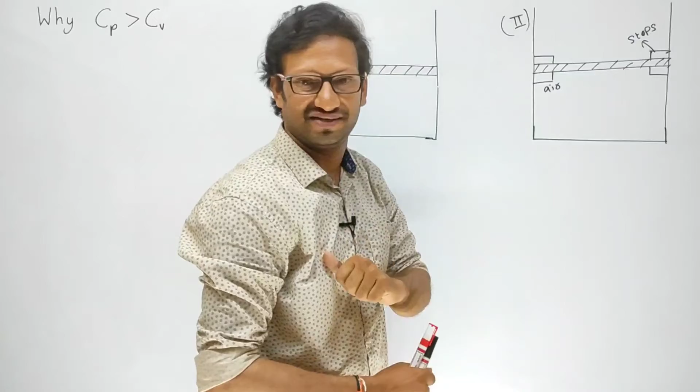Now listen carefully. Consider two cases of a piston cylinder arrangement. In the first case, the piston is freely movable. In the second case, the piston is fixed and cannot move in the upward or downward direction. Now, we know what is meant by specific heat - it is the ability of a medium to absorb or store energy.

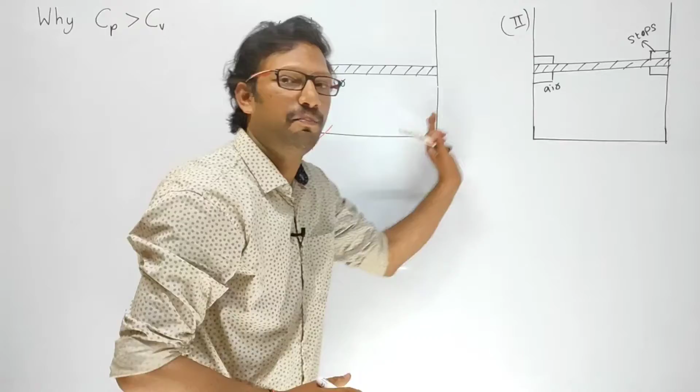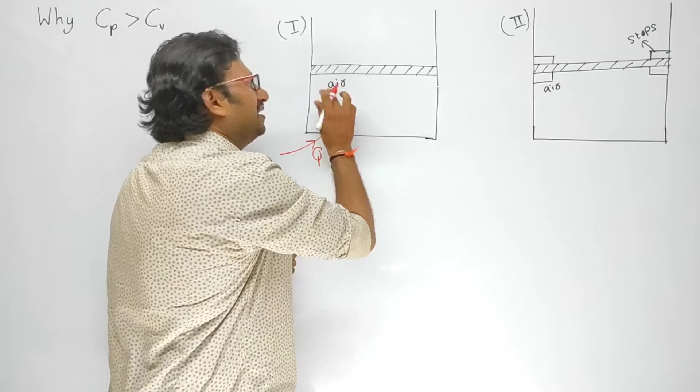Now listen carefully. By supplying heat to the system - here, what is our system? Air is our thermodynamic system in both cases. Now, by supplying heat in this first case, what happens? The thermodynamic system, which is air, absorbs heat. The internal energy of air increases so that its temperature also increases.

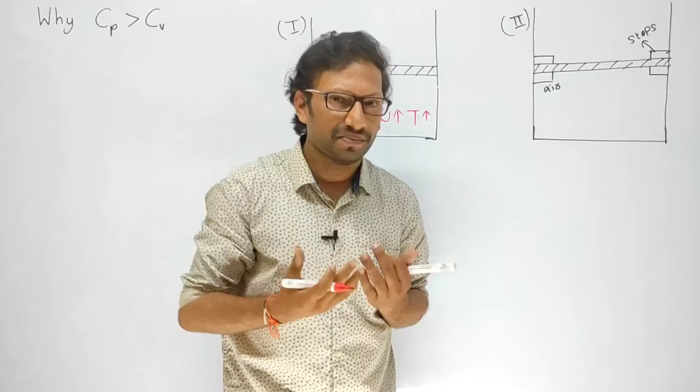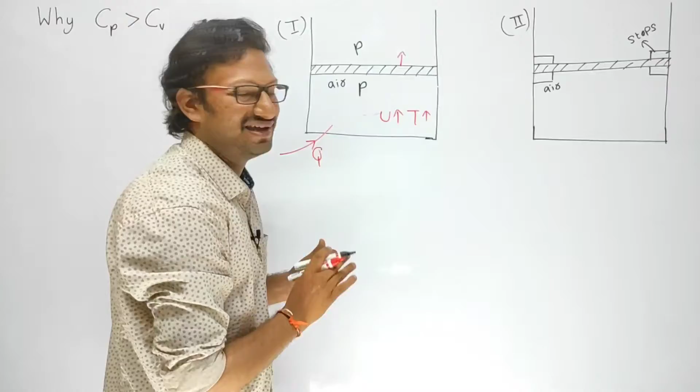Now what happened to the thermodynamic system? By absorbing heat, slowly it expands. When the air is expanding, what happens? The piston moves in the upward direction. When the piston moves upward, the inside pressure and outside pressure remain constant. Now can I say this first case is a constant pressure process?

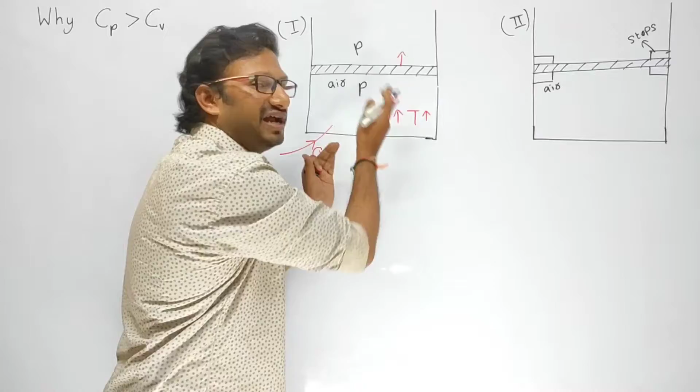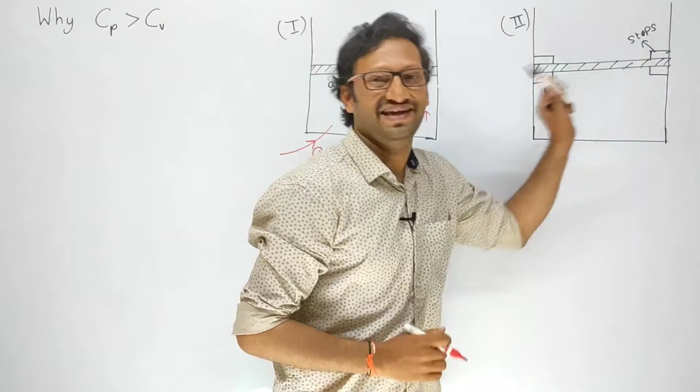Hope you understood - now we are supplying heat at a constant pressure process. Now coming to the second case, listen carefully: here the piston is fixed. Now slowly add heat to the thermodynamic system. What happens? The air absorbs heat, internal energy increases and temperature also increases, and slowly the air wants to expand.

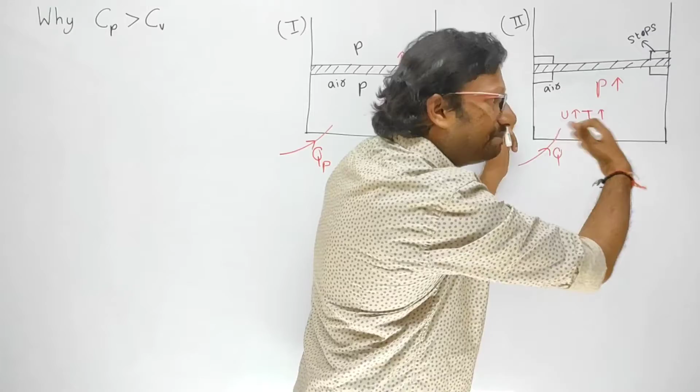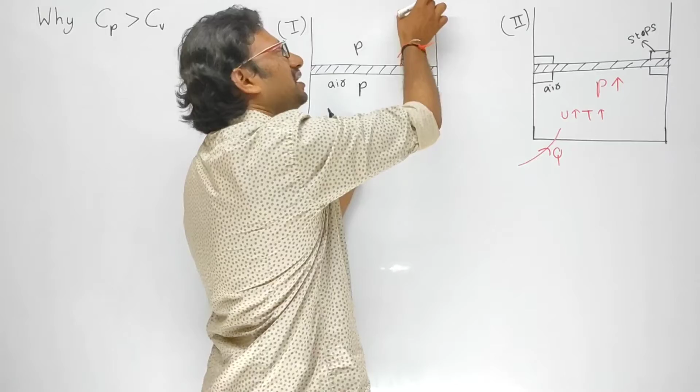What happened? Here the piston is fixed, so the air cannot expand. At this point, the pressure inside increases. And see carefully here - in the second case, after supplying heat, after some time, the volume of the thermodynamic system is constant; there is no change in volume. But in the first case, when the piston is moving upward, the volume of the thermodynamic system changes. In the second case, the volume remains constant.

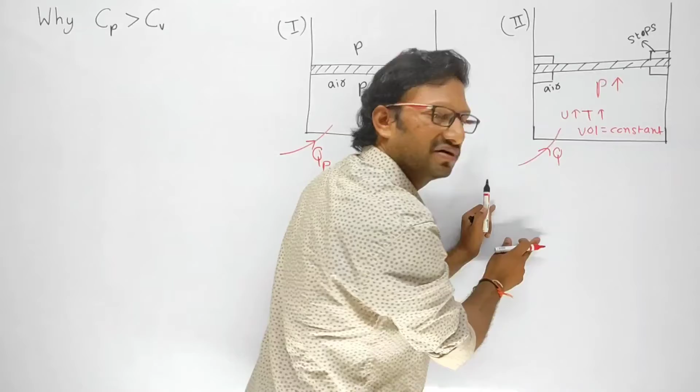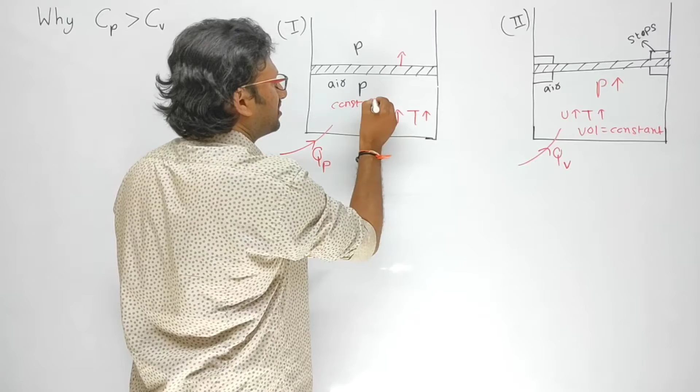Therefore, the second case is constant volume process. So we can say that heat is supplied at a constant volume process. The first case is constant pressure process. Now to understand this concept, I am going to take two conditions.

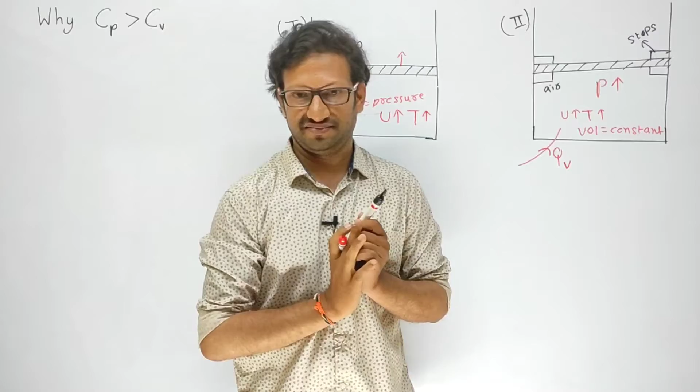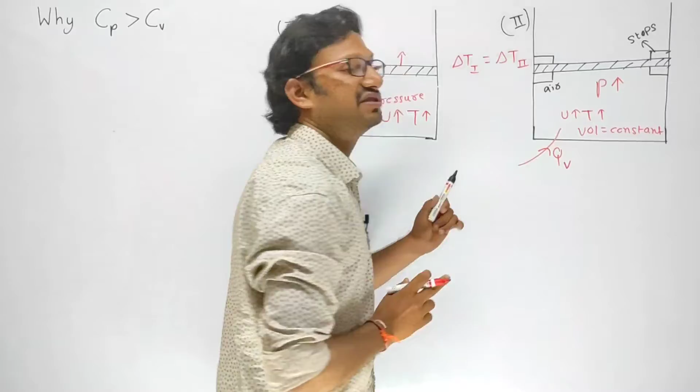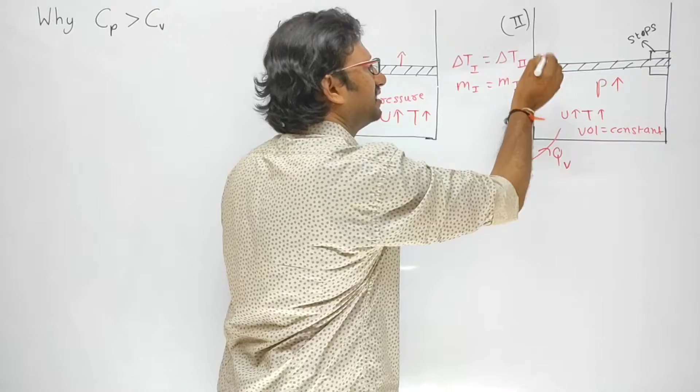What are those? Delta T in first case is equal to delta T in second case. This is the first condition. And mass of air or gas is same in both cases. Now please concentrate here.

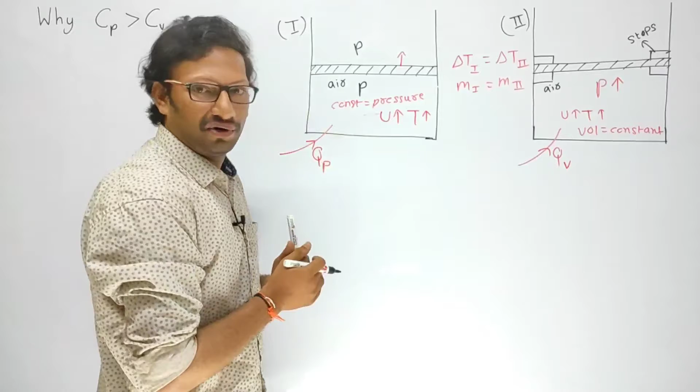Now listen carefully. From first law of thermodynamics, what is the first law of thermodynamics? We know that dq is equal to du plus dw. Now for time being, I am simplifying this as q is equal to u plus w. Alright? Now listen carefully, my dear students.

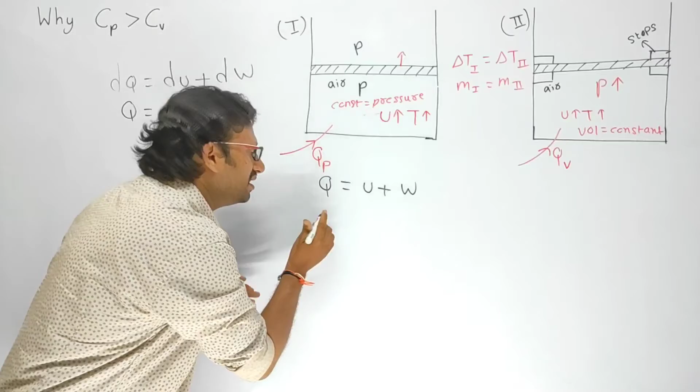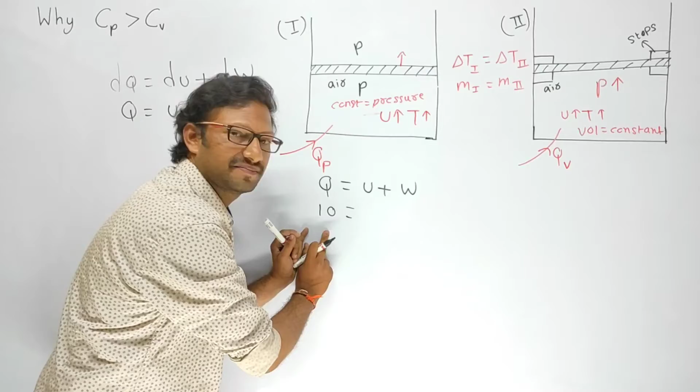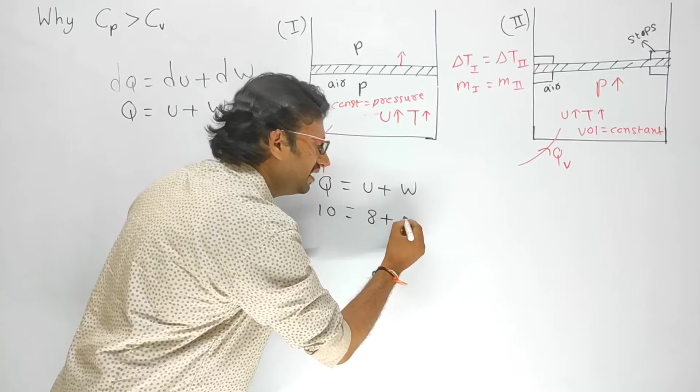In first case, we know that q is equal to u plus w. Now for example, I am taking the heat supplied to the first case as 10 units. Now in this 10 units, 8 units is utilized by the thermodynamic system, which is air. The 8 units is used to raise the internal energy of the air, and remaining 2 units is used to raise the piston. Hope you understood.

Now come here. In second case, we know that first of all q is equal to u plus w. Alright. Now listen carefully. This is very important.

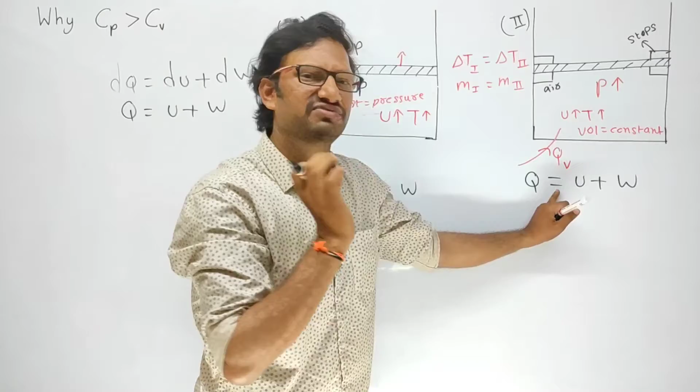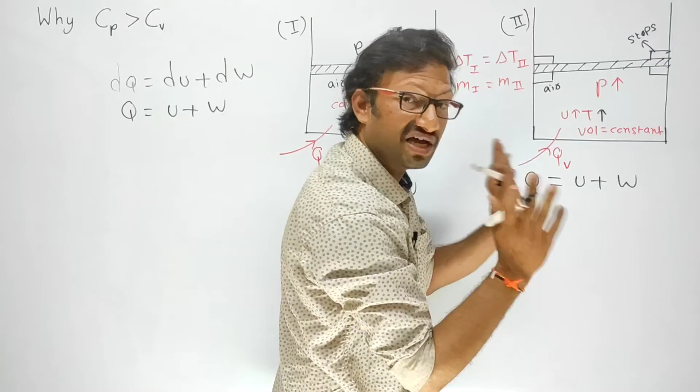In this case, by supplying heat to the system, the total heat, whatever the amount of heat we have supplied to the system, that is totally utilized by the air to increase the internal energy. Yes or no? In the second case, the total amount of heat supplied to the system is only utilized to raise the internal energy. That's it.

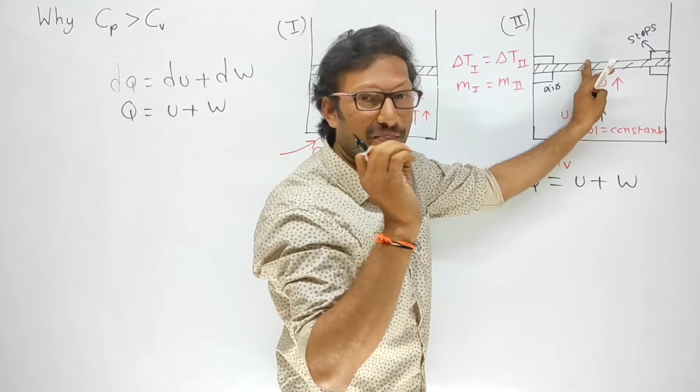There is no work done on piston because piston is fixed. Hope you got my point. So there is no work done in second case. Clear? Now whatever the amount of heat supplied, that should be only utilized to raise the internal energy.

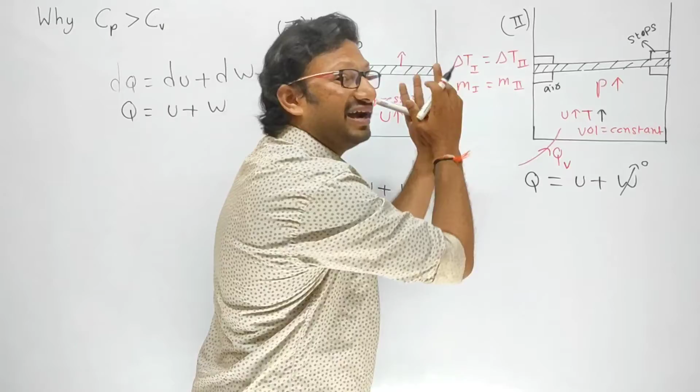So can I say q is equal to u? What I said, listen carefully. The condition, we know that what is Joule's law? Internal energy is equal to function of temperature.

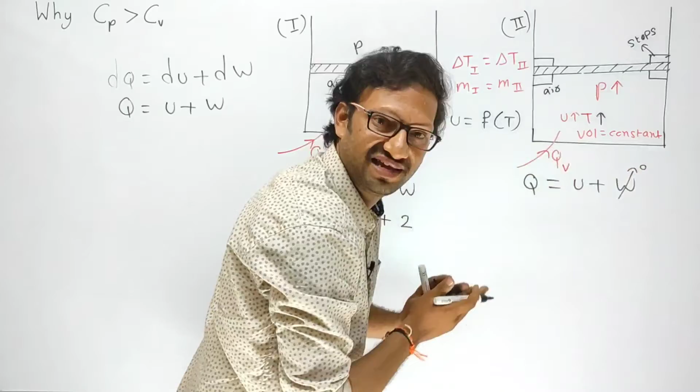As we assumed delta T1 is equal to delta T2, the internal energy in first case must and should be equal to in second case. So what is the U value we have taken in first case? That is, for example, we have taken 8 units. So here the internal energy is 8 units. So the amount of heat supplied for the second case is equal to 8 units. So I am writing this as heat supplied at constant volume process is equal to 8.

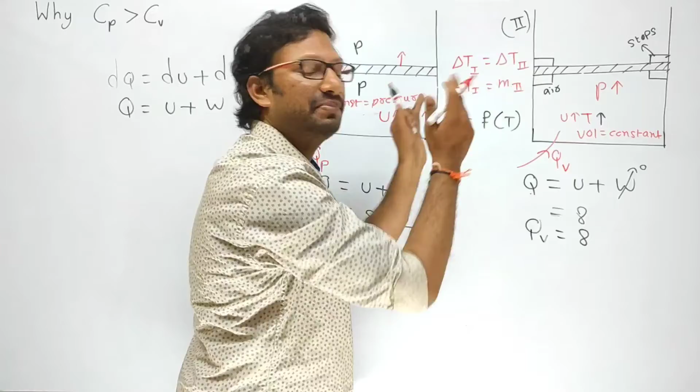Now listen carefully. Now you have to say which heat supplied is more, in first case or second case. For same mass, for same rise in temperature, therefore the heat supplied at constant pressure is greater than heat supplied at constant volume. We know the formula. Q is equal to mc delta T.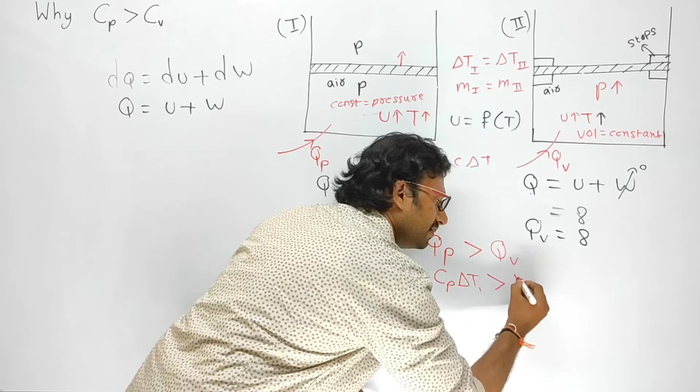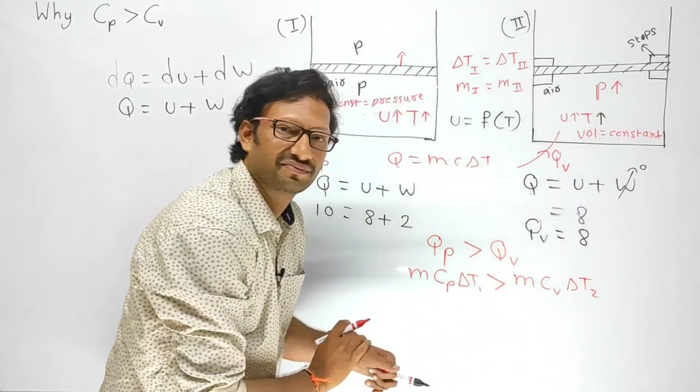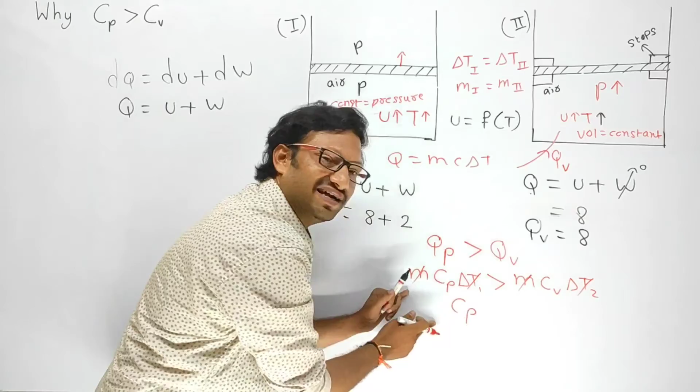Yes. Now can I write in place of QP, m specific heat at constant pressure Cp delta T1 is greater than QV, mass CV, suffix V, specific heat at constant volume process, and delta T2. Now we know that we have assumed mass is same in both cases and delta T is also same.

That's it. Therefore, specific heat at constant pressure is greater than specific heat at constant volume. That is the beauty of thermal subject. Hope you understood. If you say like this in interviews, definitely you will select in that interview. Hope you understood. Thank you for watching.